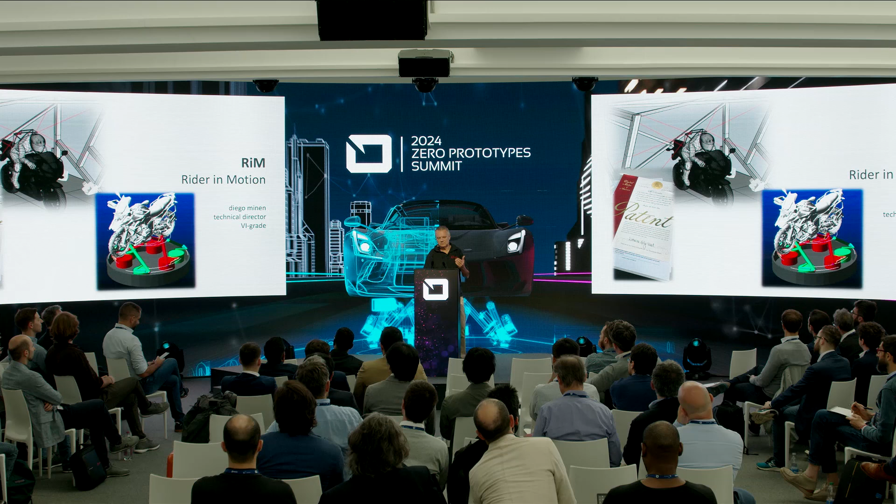Yeah, thanks a lot. It has been a few years that I've been working on this motorcycle simulator concept, let's say. As you all know, we use intensively simulation for simulators. Seems to be obvious, but not always. And we received a patent also, by the way, covering all the principles of innovation and originality for this simulator. And I tried to give you in this presentation some of the ideas that are behind, also completing basically what Enrico told you with the interesting work they did on the virtual rider for several years.

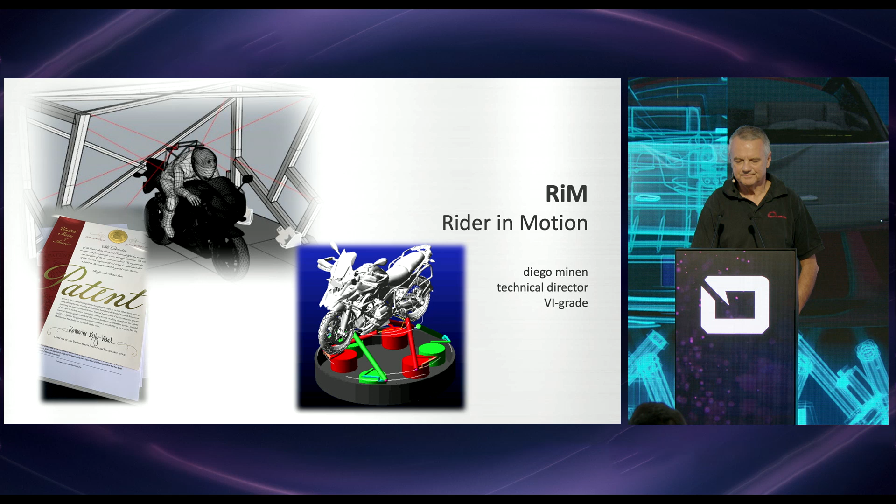Basically, there are a few motivations for us coming up to the development of a concept. By the way, it could have been more a physical realization of the concept. A couple of years ago, I was that close to start the development of this, but for several reasons, including COVID and others, it was not possible. But let's say we are more ready to start.

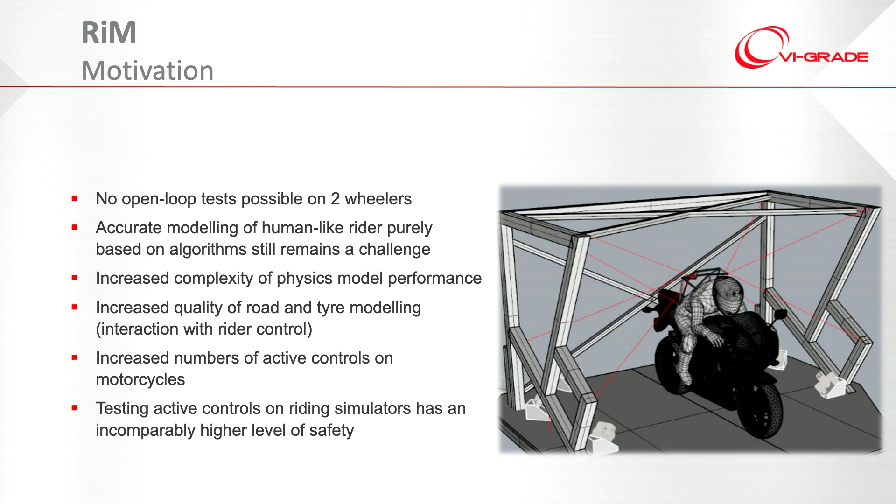So, being a motorcycle rider myself for a few years, it is very difficult to think that you can control in open loop a motorcycle like you do for a car. Then, as Enrico has told, accurate modeling of a human-like rider is not always possible with algorithms. There is an increased complexity of physical model performance, which clearly justifies the usage of those for feeding a simulator. Increased quality of road and tire modeling, as Flavio has

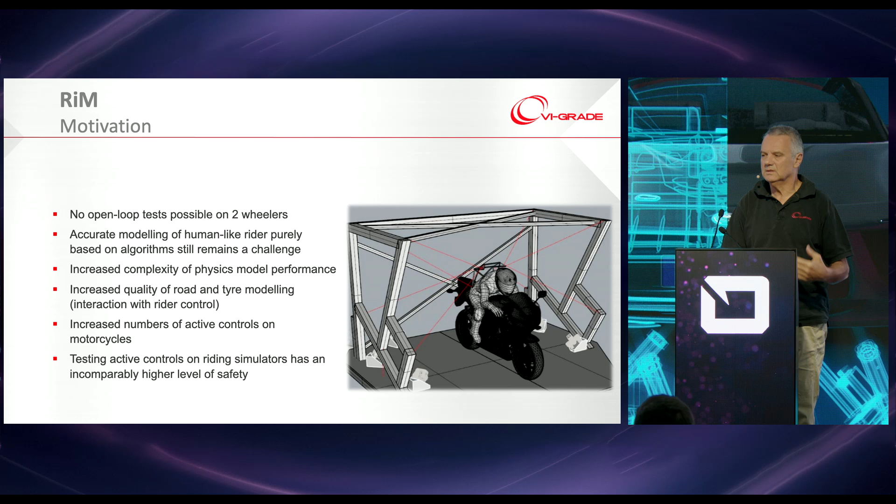presented before. And also, among several other things, there is an increased usage of any type of control system in the motorcycle, like is happening with the cars. And of course, the level of risk that you have testing all this together with a human rider on the motorcycle is very high.

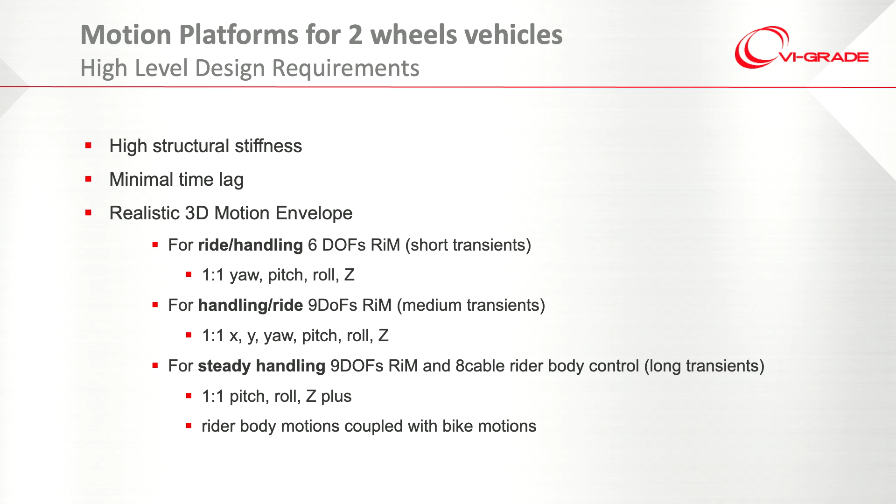So we have identified some of the characteristics of a possible motion platform that could do the job for moving, let's say, at least as a rigid body, the entire bike. But we also consider that we want to put a rider on it, and not a rider like a passive bag, but a living rider, alive and kicking. And sometimes it's very important to kick the bike or not to kick the bike. And for this reason, we had listed here several different aspects, if we are more focusing on ride and handling, or steady handling.

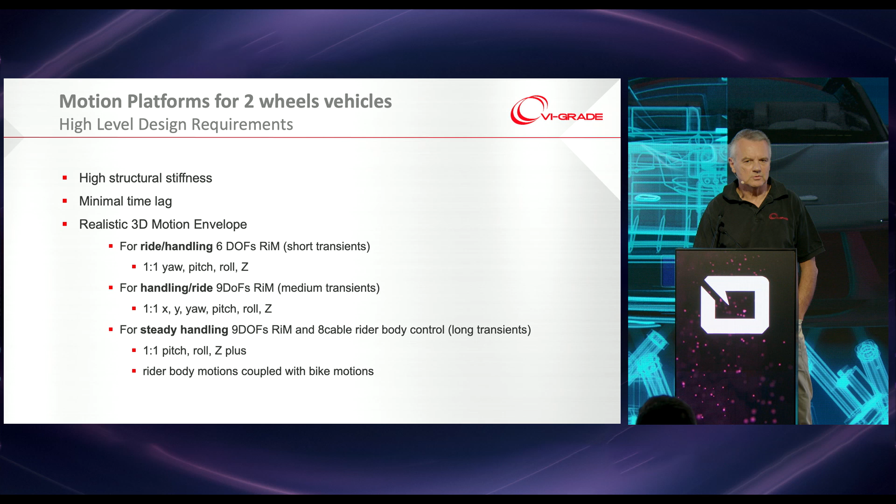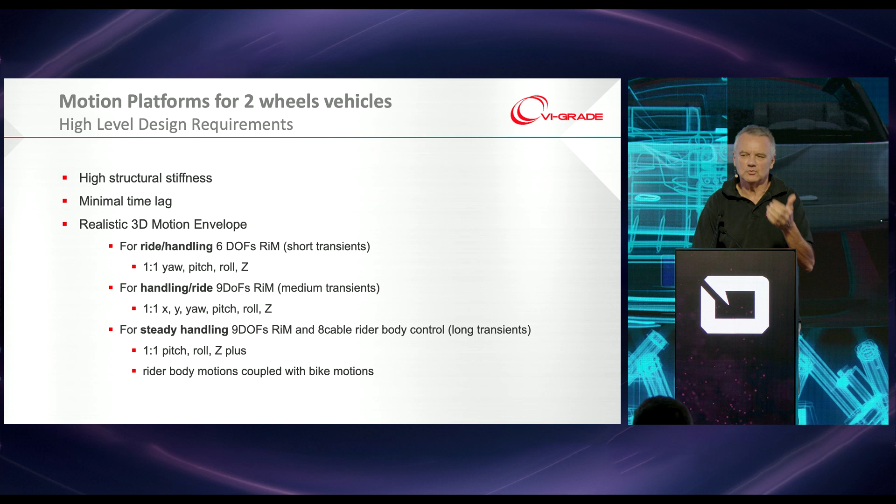As you know, steady maneuvers are the most difficult to obtain on any type of simulator, because a simulator for terrestrial vehicles at least should have a certain workspace and should always go back to its position. And this is not ideal for developing stationary acceleration. You would like your simulator to continuously move somewhere for you to continue to experience acceleration. That's not possible, and so what can we do?

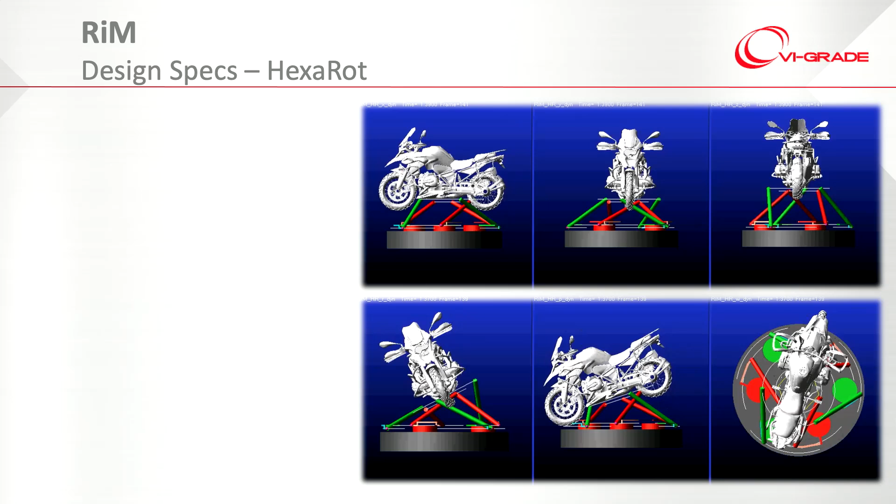First of all, showing this new concept platform that we call Hexarot. The Hexarot, which has also been patented independently from the motorcycle simulator, is a new 6 degree of freedom mechanism which has certain characteristics that are quite interesting from many aspects.

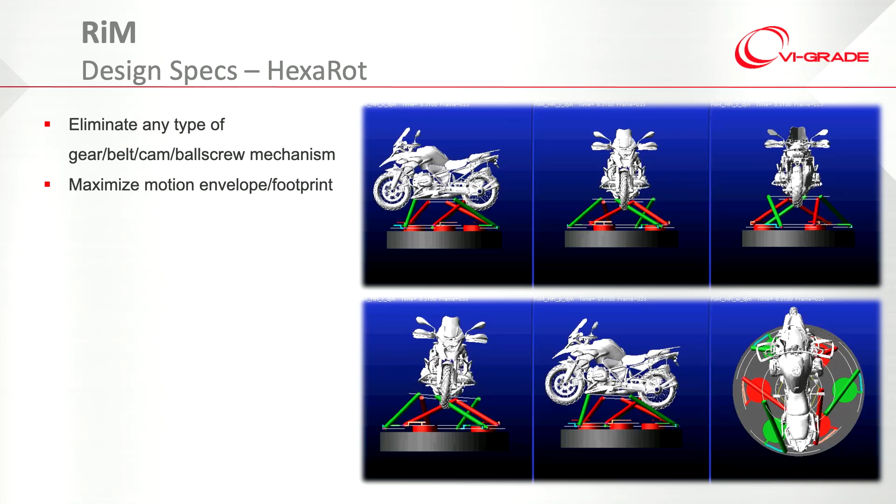We have basically the aim of trying to maximize the simultaneous motion of the platform, not one single degree of freedom but contemporary, and that's very important for motorcycle dynamics, with minimal latency, minimal noise, maximum possible frequency response, and also easy mechanical parameterization.

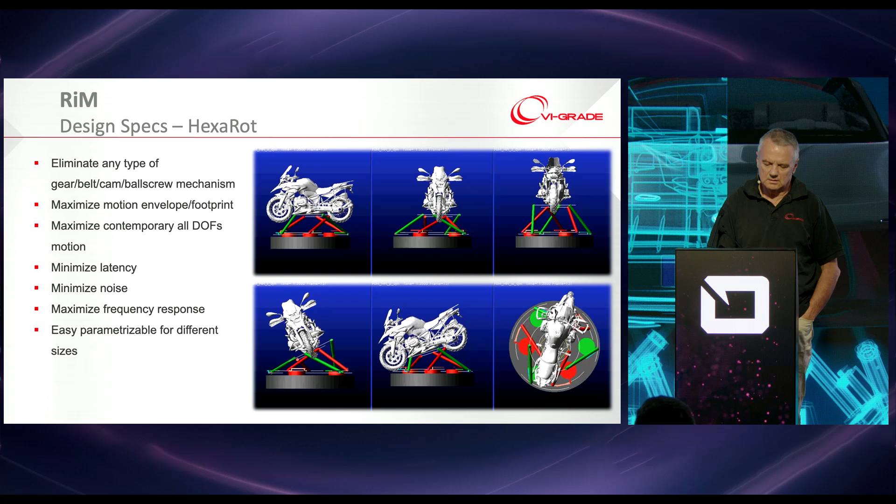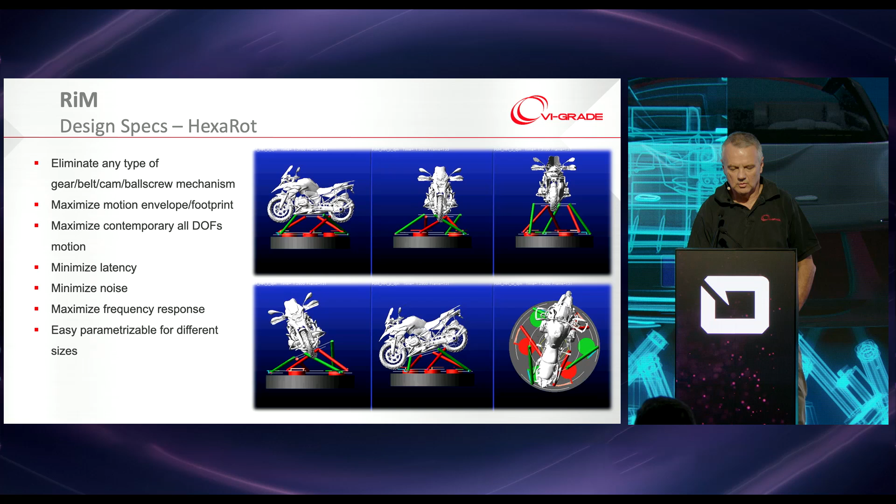So the concept, I think, is quite simple. There are 6 crankshaft mechanisms put on a circular base. And then these crankshaft mechanisms act on 6 rigid links that go to whatever vehicle you want to put on it. In particular, you see here a motorcycle. Of course, this new mechanism, which is under construction now as a first prototype independently from a motorcycle, but very suitable for a motorcycle, can be mounted on any type of our low frequency stage that we use for handling.

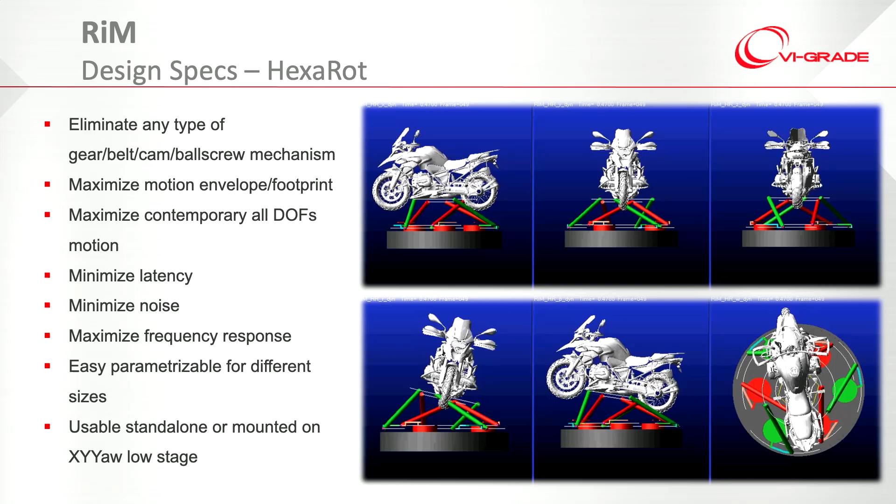A configuration example could be this. In reality, again, we did not think exactly what could be the ideal configuration for a motorcycle, but the system is quite flexible in terms of design, also because there is a sort of independence from, for example, electric motors and the entire mechanics.

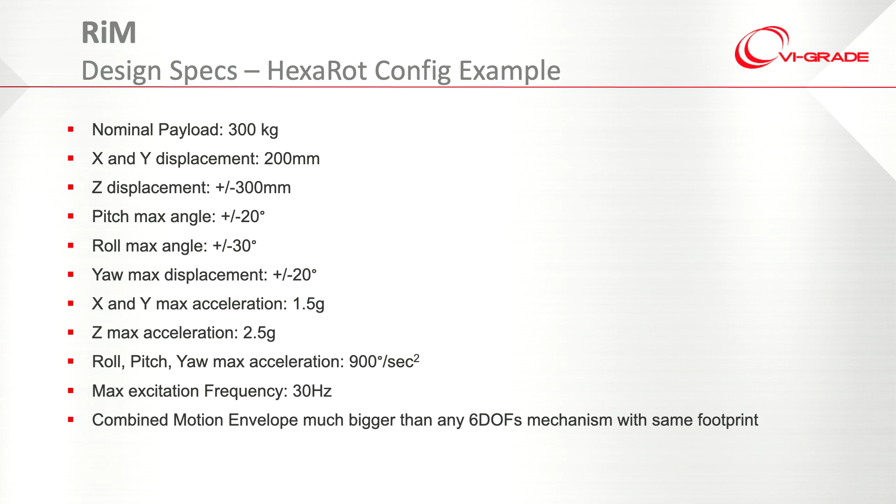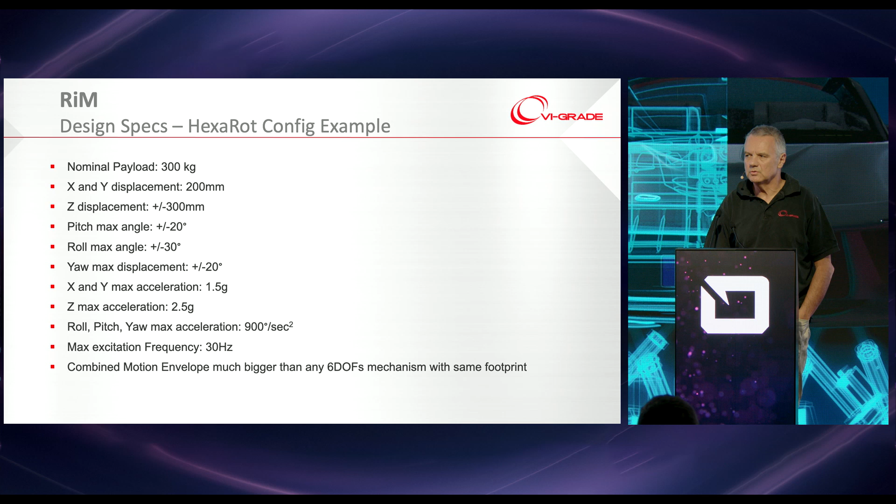So you can think about these electric motors being put in any angular position relative to each other. And then this bar can be as long as you want, the crankshaft mechanism can be adapted. So it's really a new family of motion platform that we are introducing. And in this case, it's entirely VI-grade behind the development of the platform from the mechanical point of view, electronic point of view, control system point of view.

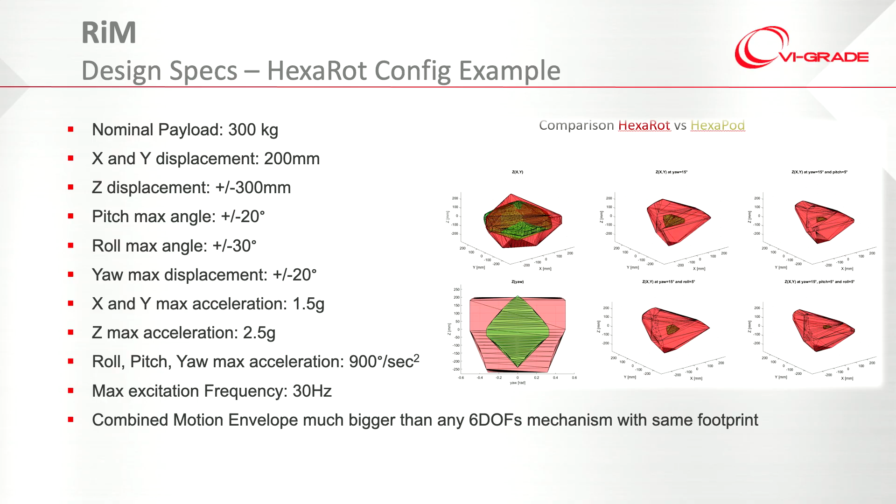One interesting aspect of this platform: consider a hexapod, for example, that has the same footprint, because when talking about simulators, of course, you cannot compare a 2-meter simulator with a 15-meter simulator. So let's talk about a couple-of-meter footprint simulator. Then this HexaRot can guarantee a motion envelope, as you see in this picture, where, when you introduce more simultaneous degrees of freedom, the motion envelope of a hexapod is tiny. It's a super small thing compared to what we can obtain with HexaRot.

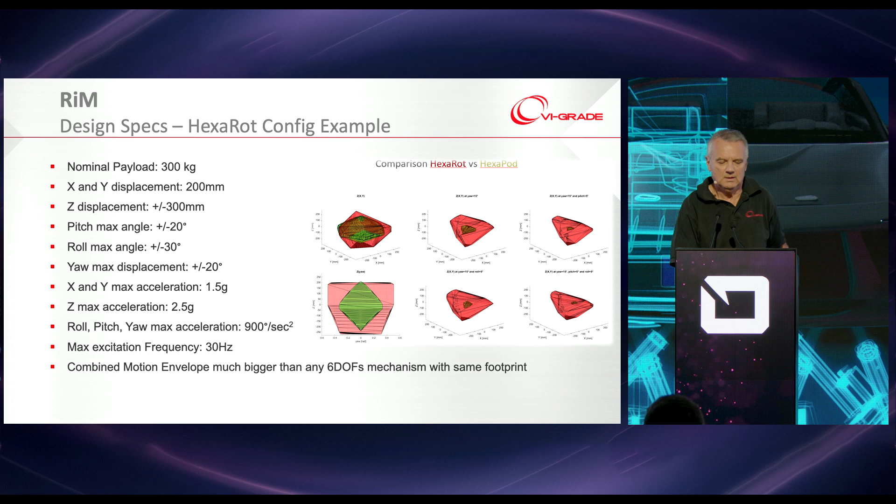Now, motorcycle dynamics is clearly one of the most intuitive situations in which you need simultaneous motion, right? Also an aircraft, but for example, an aircraft does not yaw. So, okay, a hexapod can do quite a good job for an aircraft because a lot of pitch, a lot of roll, but no yaw. In reality, you also yaw with the motorcycle, so you have to take into account all this.

So I have a slide that tries to illustrate the control logic of this, including the control of the rider. This is a very schematic thing. I took advantage of existing 8-cable robot work that is known around. A few years ago, the Max Planck Institute in Tübingen used a gigantic 8-cable robot. I don't know if you have seen it in some movie. They wanted to do a sort of helicopter simulator.

But the principle is that with 8 cables, you can control 6 degrees of freedom in a rigid body. You need two cables more than the degrees of freedom. Why? Because cables don't transmit compression forces. So you always need cables in tension. So 2 cables are always used to maintain the preload, okay?

And I thought, okay, what if instead of moving the entire motorcycle... this cable robot, for example, has a limitation that it cannot do yaw, because if you do yaw, you have all the cable spaghetti crossed. But if I move the cables together with the platform, then I don't need a lot of yaw because the platform does the yaw. So let's use this.

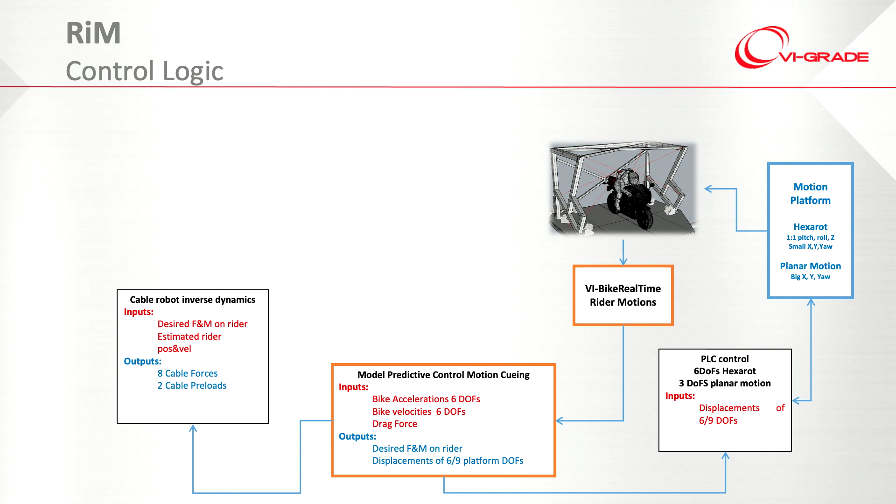Because one of the problems several motorcycle simulators have is that you do some roll, more roll, and then you fall down. What is that? Normally, when you do a turn with a motorcycle, you don't fall down because you have inertia forces. But to implement inertia forces is not easy. And thanks to this cable robot idea that came to my mind, we can apply proper rope forces to a special gear on the motorcycle rider.

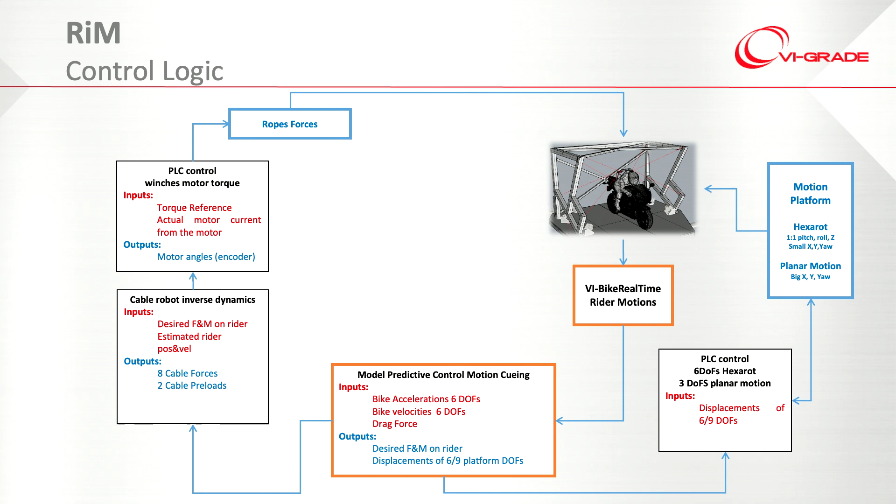Motorcycle riders, besides scooter riders on the beach, let's say, don't mind wearing something that is protecting them, as well as they don't mind wearing a helmet. Actually, they are obliged to wear a helmet most of the time. So if we build the proper gear, we can put hooks in the right points to connect the rider's body to the cable system.

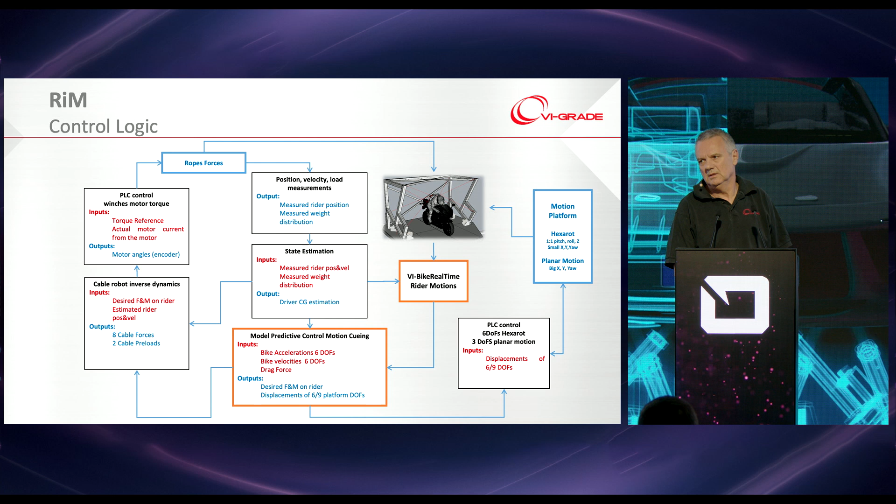And then when we have that, from the rope length, we know the position of the rider. Knowing the position of the rider, in real time we feed BikeRealTime with the position of the rider. And the equations of motion change because of what Professor Gobbi explained: the whole thing is very much inertia dependent. We close the loop and we enjoy the ride.

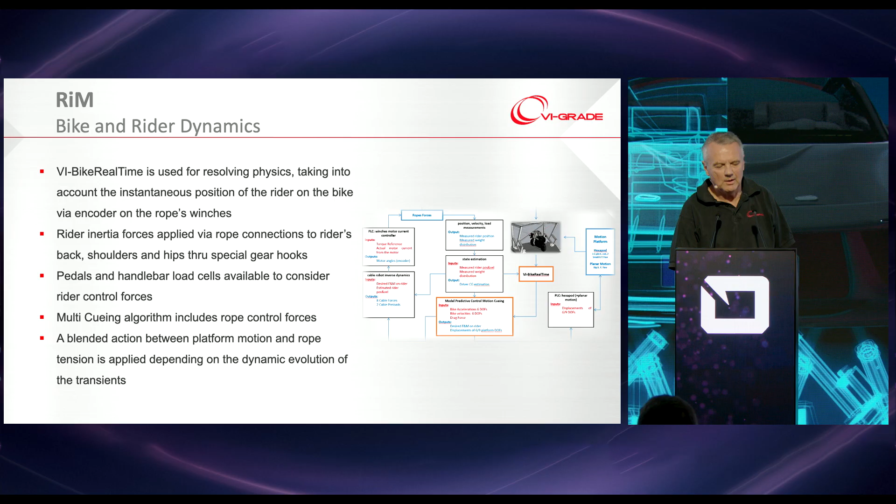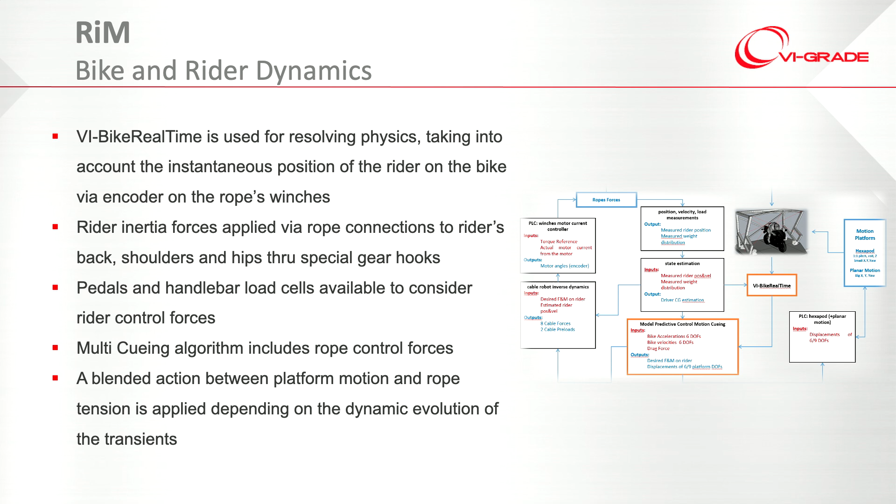Talking about that, and recalling the slide before just as a sketch, let's say this slide is describing what I was talking about, with the addition that we can, of course, monitor also the pedal forces, we can monitor the handlebar forces, all information that could be used for what the development of the University of Padua is trying to do: to complement maybe unmodelable things in terms of pure algorithm of what's going on.

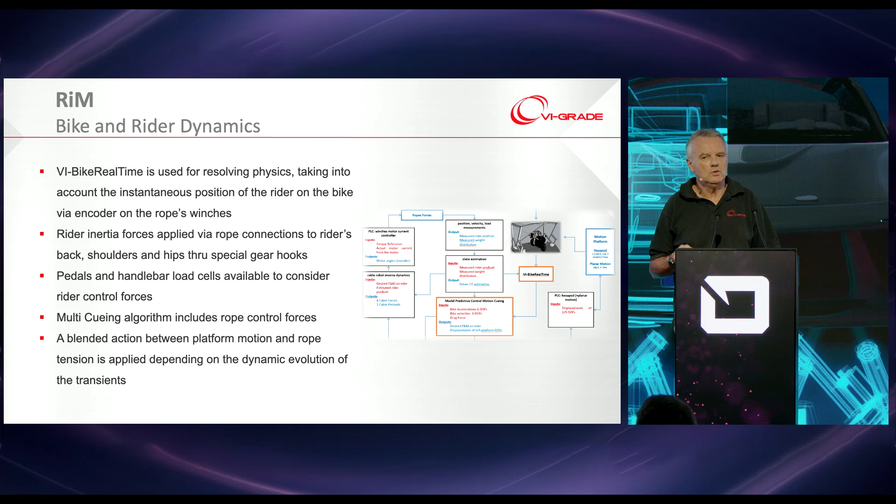Because if you are a motorcycle rider, you know that pushing a pedal, you obtain a deviation of trajectory if you don't touch the handlebar. Why? Because clearly your body moves on the motorcycle, and then you affect the inertia instantaneously. So that part is very important. The analogy that we have is: as we use active seat and belt on a vehicle simulator, we use ropes on a motorcycle simulator, basically to feed what is missing from the motion platform.

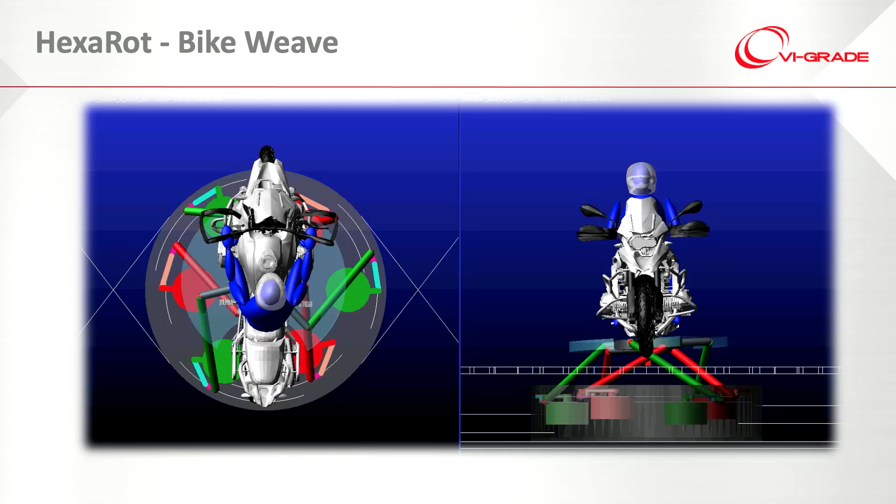Of course, I could have certain cases like the one I'm showing you now, in which the motion platform by itself can do a complete job. Because in this case, the weave oscillation requires more space. And I have the rider on top, he's subjected to weave, his body has all the inertia forces, and so on. Even for this type of maneuver, I can use the motion platform with an extension of X and Y and big yaw, making slide the entire hexapod.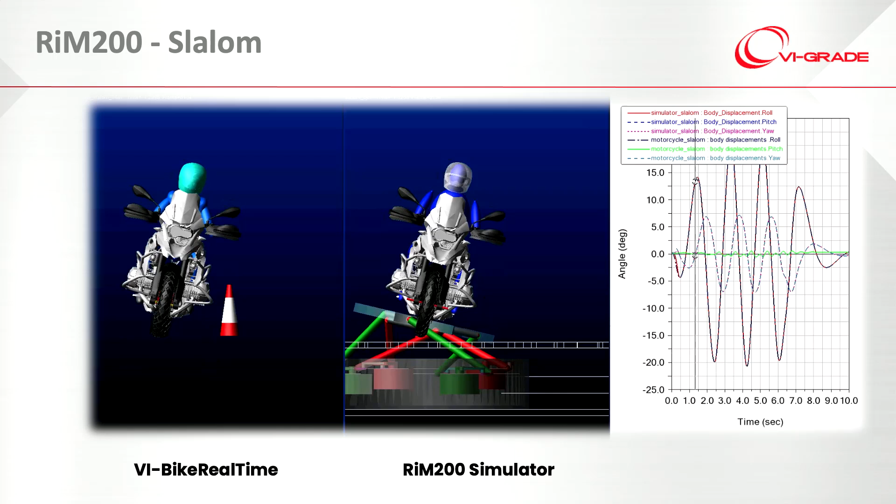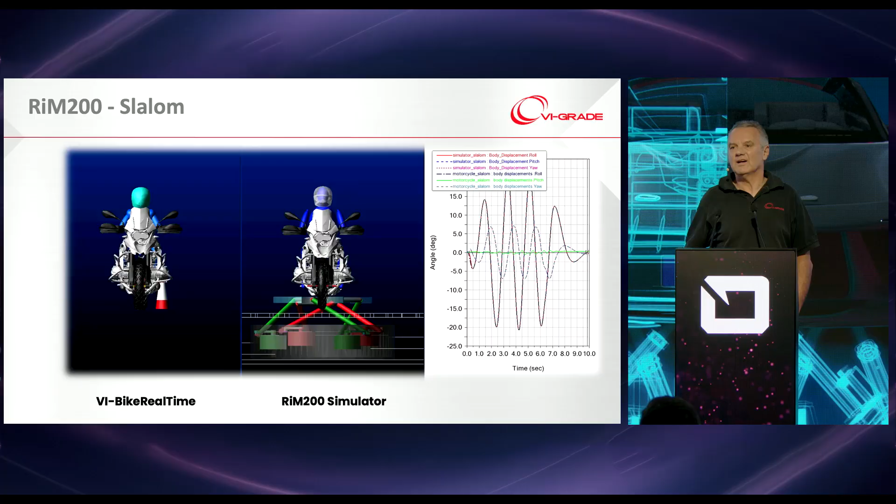Thanks to the work of Nico, I was able to compare basically one-to-one the important states of motorcycle dynamics for a simulation in the traditional environment or a simulation on the simulator. Basically, for this maneuver, I don't need any rope because the transients are in the correct timing to obtain inertial forces on the body that are physically realistic for the rider. Of course, then, you see this quite fancy

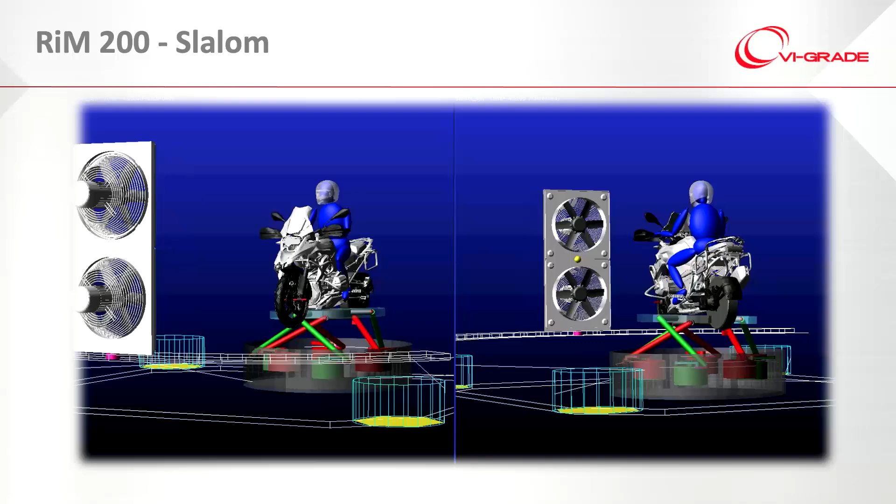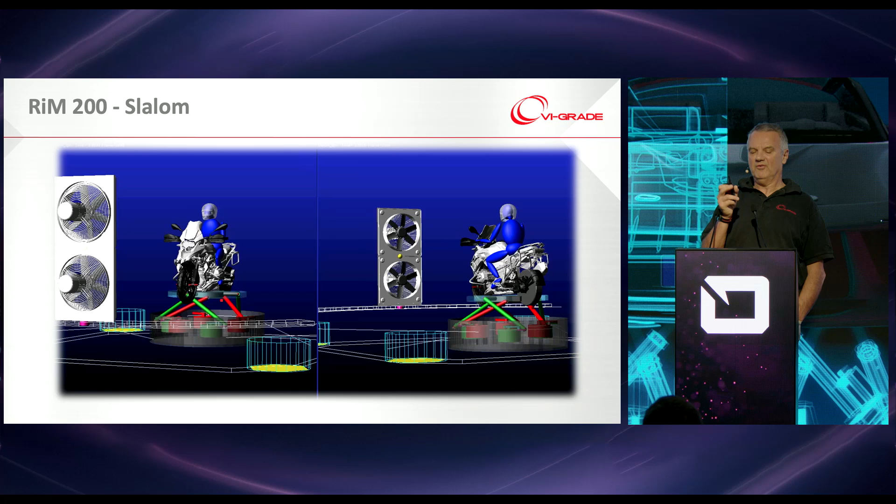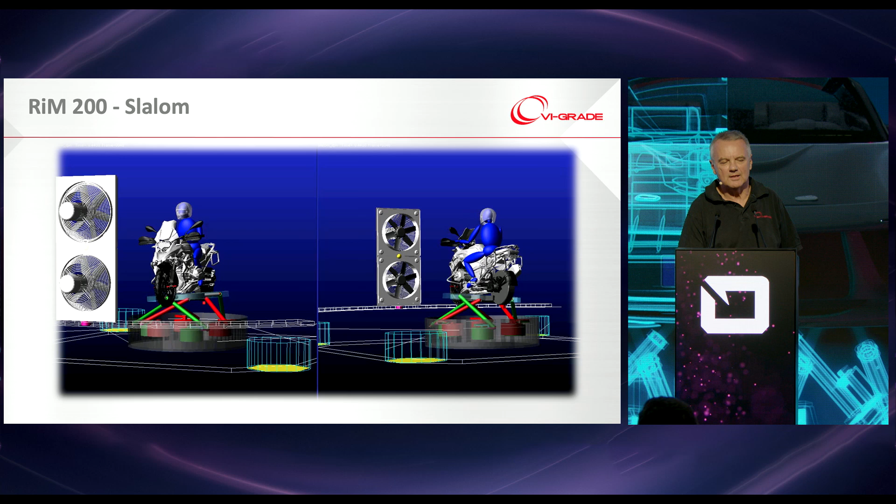movie. Of course, I have situations in which I want also to include other realistic effects. For example, if you ride a motorcycle, you always have air. I don't know a situation, besides maybe running on the moon, in which the air does not affect the dynamics. So we thought, okay, let's use the air. Actually, in this example the fan is not only for having drag forces on the body, but also to cool the motorcycle, because my idea is that we have to put a real motorcycle on the simulator.

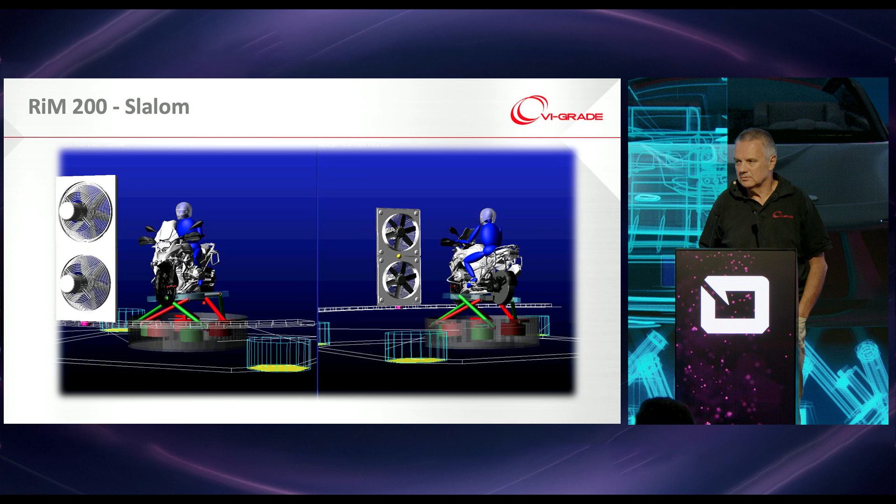One can invent whatever, but a motorcycle is something that is so much connected to the body that if you don't really have super sophisticated things, which then make it very difficult to achieve the goal, it is better to use a motorcycle. Or at least it should be possible to use a real motorcycle on the simulator. So the fan, guess what it is used for? For cooling the engine, because I want the engine to also be fully working on the simulator. Okay, I show you this movie in which the rider is in the cage controlled by the cable. Sooner or later, we need a cage also for safety reasons.

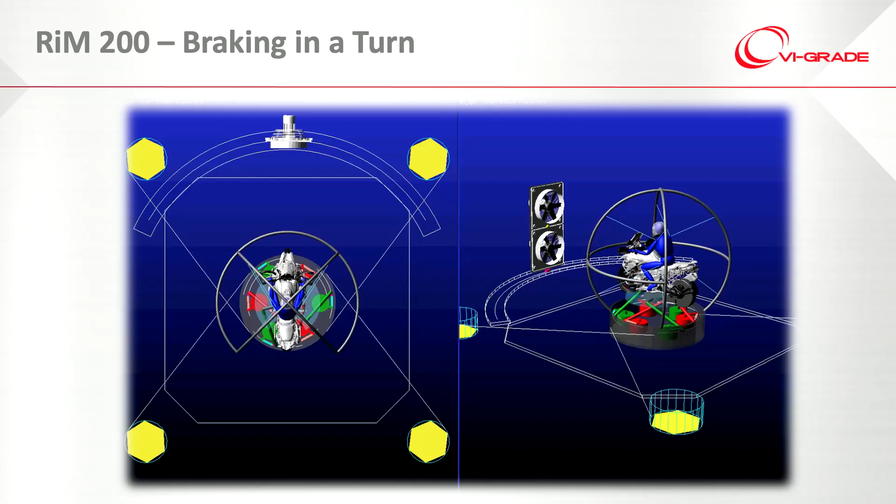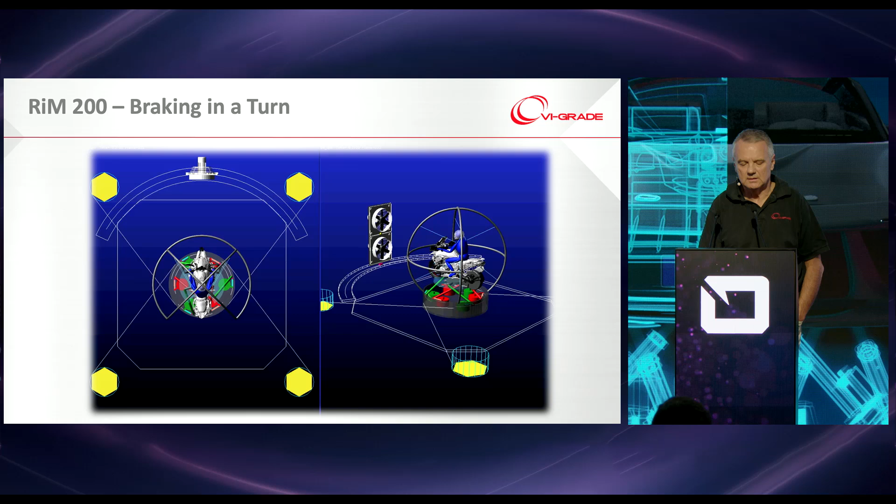Then the idea is to have the entire motorcycle. We can put shakers on the front wheel and rear wheel. We have powerful enough shakers to make vibration. And then the motorcycle transmits vibration with the engine and with tire forces to the rider. And the best thing is to generate oscillation where they start on a motorcycle. So the engine and the tire or the suspension hub should be excited. And as you will see in the next days, this new functionality, to complete the feedback, complete the immersion of the rider or the driver with high-frequency vibration, changes the game in driving simulators, and we think also in riding simulators.

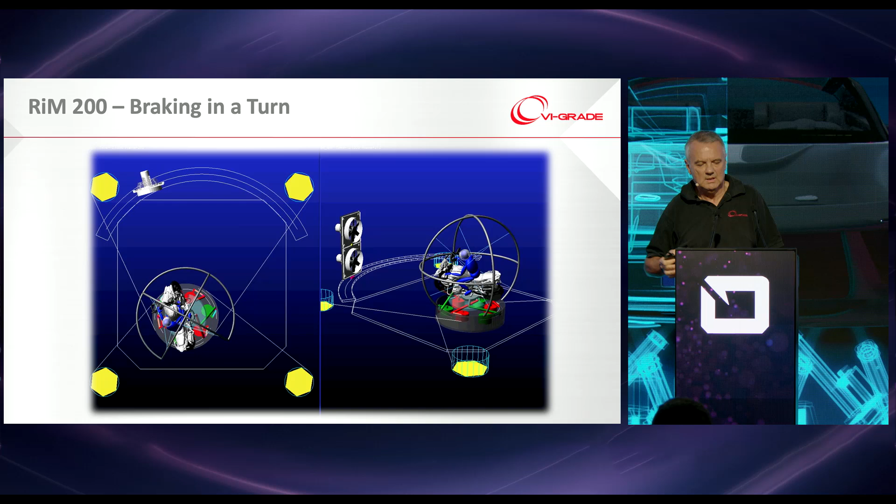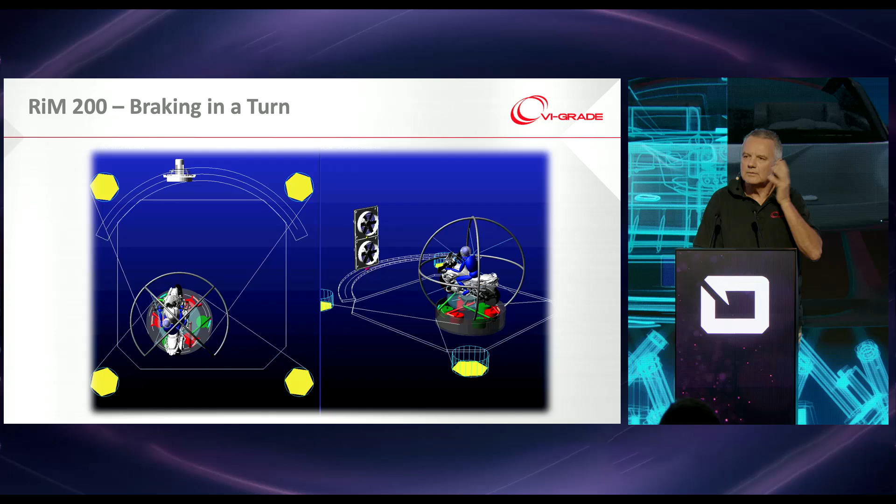Because for too long, and in many situations, in the development of driving simulators, all these effects have been ignored, saying, okay, the NVH guys can sit just in a simple cockpit and feel vibration. In reality, your body feels everything. You cannot separate your brain: now I don't want to feel vibration, I want to feel only dynamics. Now I don't want to hear acoustics, I have to see only visual.

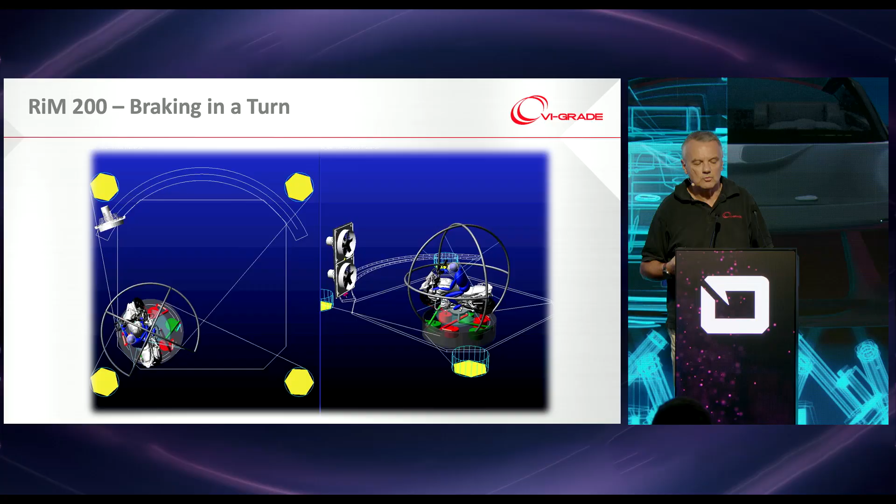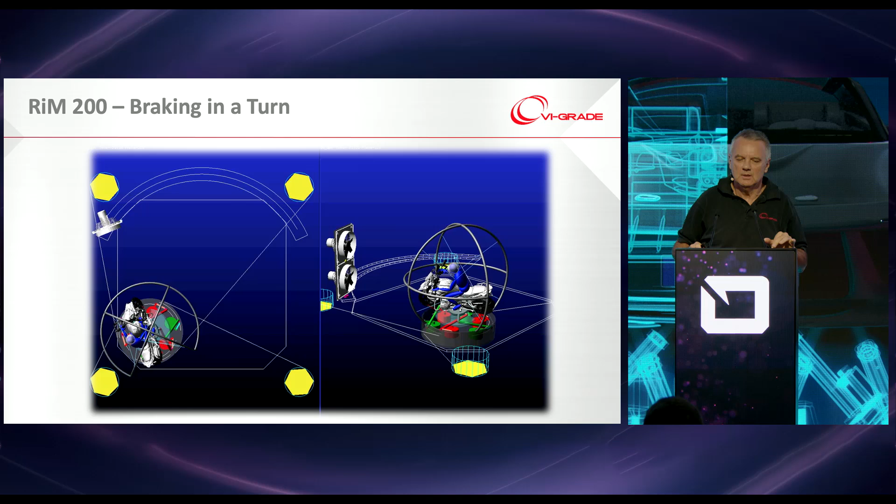In a real vehicle, could be the worst vehicle ever, you have everything. So you have the complete spectrum on your brain: your vestibular system, your haptic system, your perception system, everything. And the reason in many cases why you have motion sickness is because the simulator is trying to tell your brain, hey, you work separately, okay? Don't worry about vibration. And then the brain, used to reality, says, okay, I feel vibration. Why don't I have vibration? So it starts to be preoccupied.

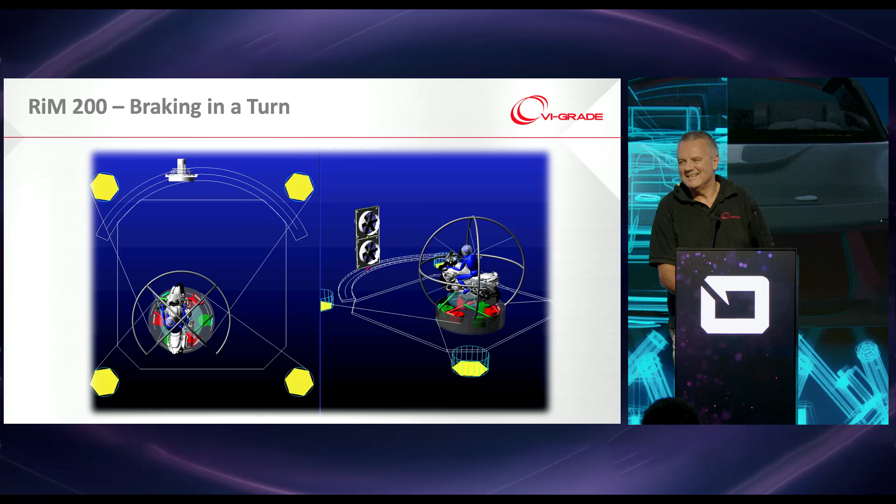Then I notice something in the visual that is wrong. This is not real. If the brain, which is of course you, is distracted by many sources, then this paranoia of noticing what is odd is gone. So the best way to resolve the motion sickness problem is to feed the brain with much information, all the possible information that one can have. And vibration is one.

And the air: if I have a motorcycle with a helmet at a certain speed, the air noise is one of the most important things. Not mentioning 300, because it probably is the only one. But even at a speed above 100, I would say.

So, how much time? 33 seconds. Minus. No, plus.

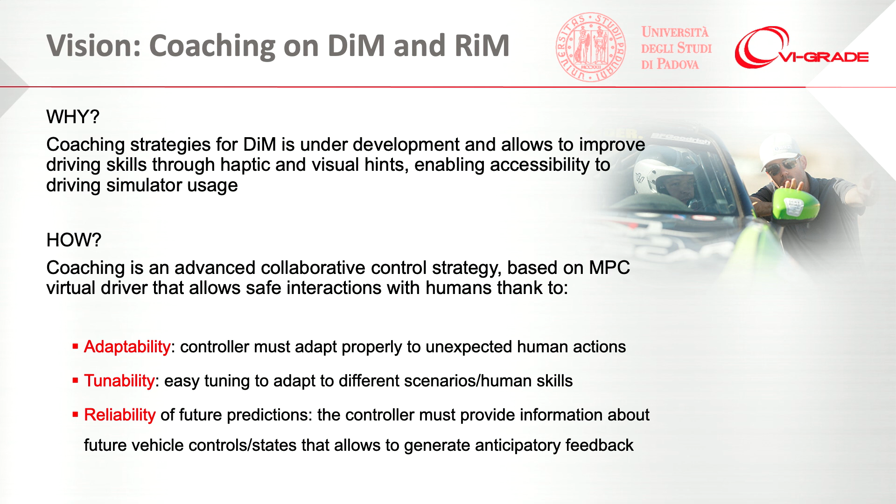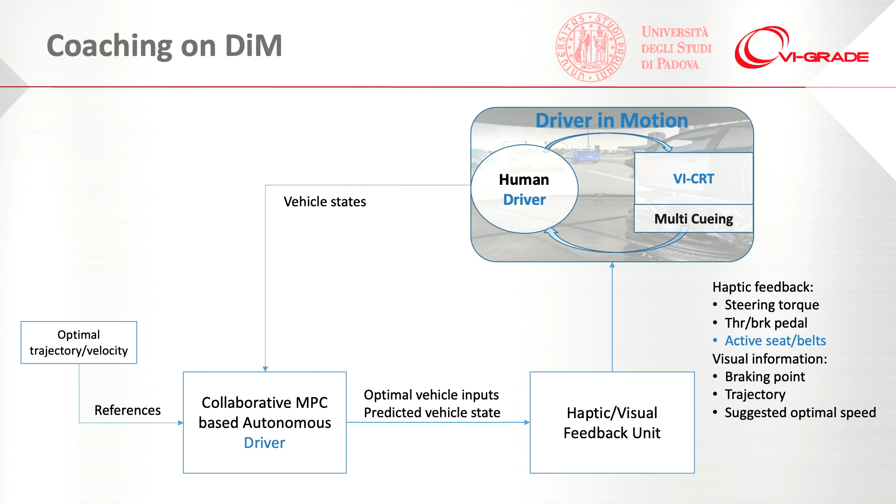So basically now, trying to connect my presentation to the excellent work of Mattia and Enrico shown before. What can we do now if we implement this principle? Well, basically, there are several things. I try to make an analogy to what we have done with the driving simulator. It is the same principle. We have a human driver using real time as a source of physics, numerical physics. Then we have all this type of feedback. Again, the active seat and belt is the example that we use for the driving simulator.

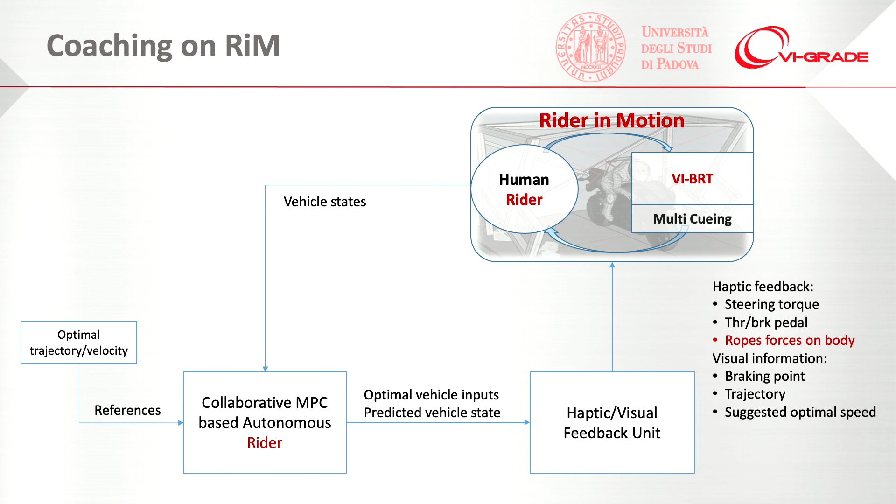And if I put the riding simulator with this coaching principle, the idea is clearly that I have a human rider on the bike. He tries to follow a certain maneuver, but I also have developed a virtual rider that can suggest to the human how to ride or also how to drive. Mattia's group has developed in the past some coaching principles for the virtual driver. You want to speak with him for that. So that is one thing we would like to do, keeping in mind the success we had so far with the driving simulator.

Again, there will be synergy between the offline and the online, in the sense that it's very difficult to model the rider, but it's also very difficult to develop a control that is not taking into account all. So for feeding the rider with the right model, you need the real rider. So the loop becomes very virtuous if you connect the one to the other. And that is, I would say, one of the advantages.

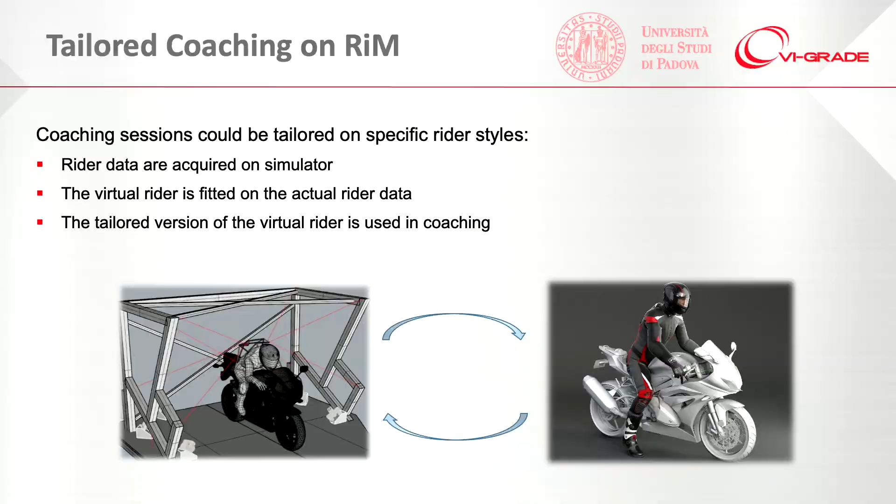Actually, I am surprised that until now big companies, big motorcycle companies, even Italian, don't say, hey, we need a riding simulator. I am patient. That's why we are here, Diego. Yes.

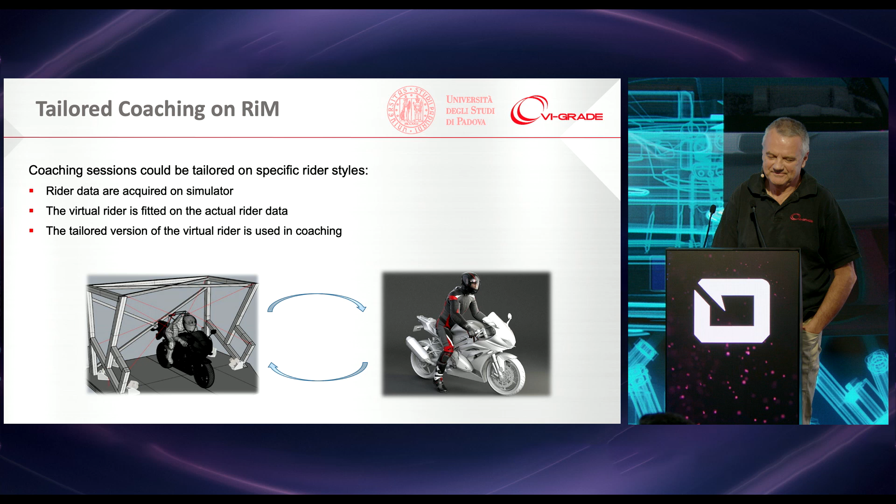So you can imagine how useful it could be to have coaching behind the scenes, coaching the rider on the simulator. Because it's difficult sometimes to explain what to do to a non-rider, even to a rider sometimes.